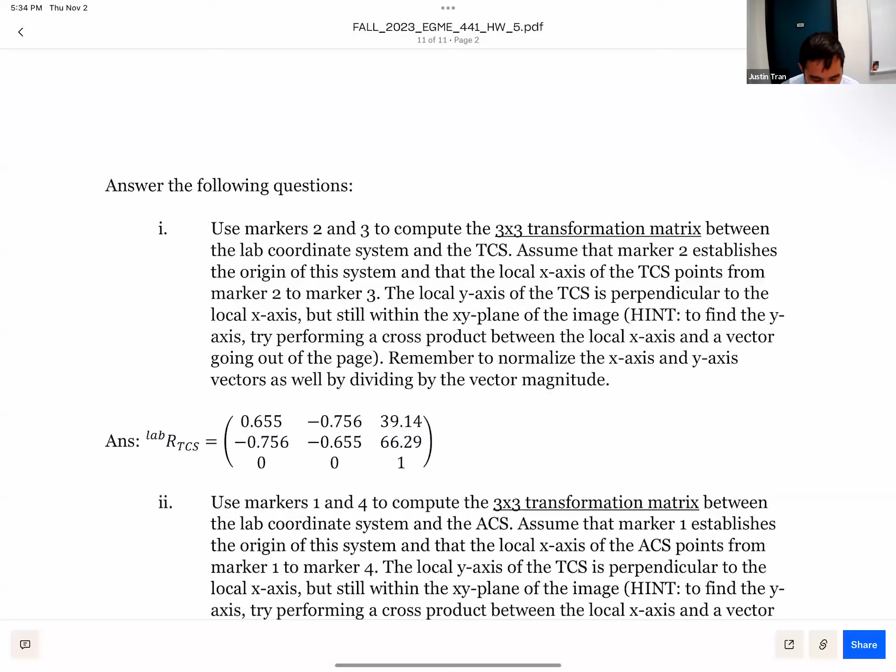So I've always been like this, 12 years ago to today, I haven't changed at all. It's also funny that we still use the same fluid mechanics textbook today as we did 12 years ago. I still have that textbook in my office too - I totally forgot about that until my mom showed it to me recently. Anyway, alright, let's get back to it.

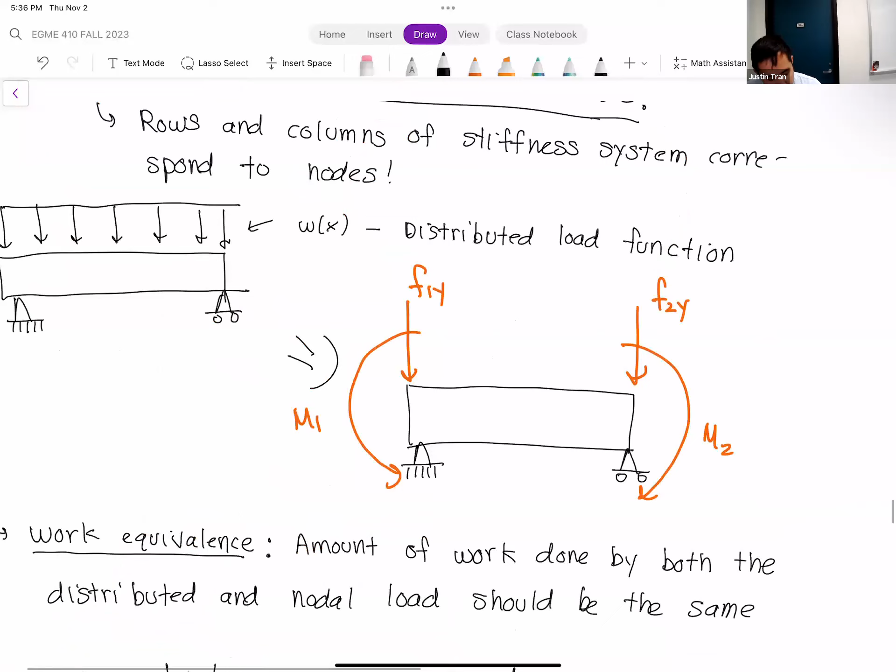So what we were covering on Tuesday before we left off was this idea of distributed loading. Let me scroll up to a good picture. Distributed loading is something we've been using in ANSYS a lot, and in fact that's the preferred way I've told you to apply loads - distribute it over a surface or over an edge. You want to avoid applying loads at a point.

But the conundrum we have is that in order to actually apply loads into your finite element system, into your global linear system, that giant matrix, we have to compute the loads at a point, because that's exactly how it's entered into the matrix. So to use a distributed loading in a finite element situation, we have to go through a conversion process to convert it into a nodal one - going from the image on the left to the image on the right.

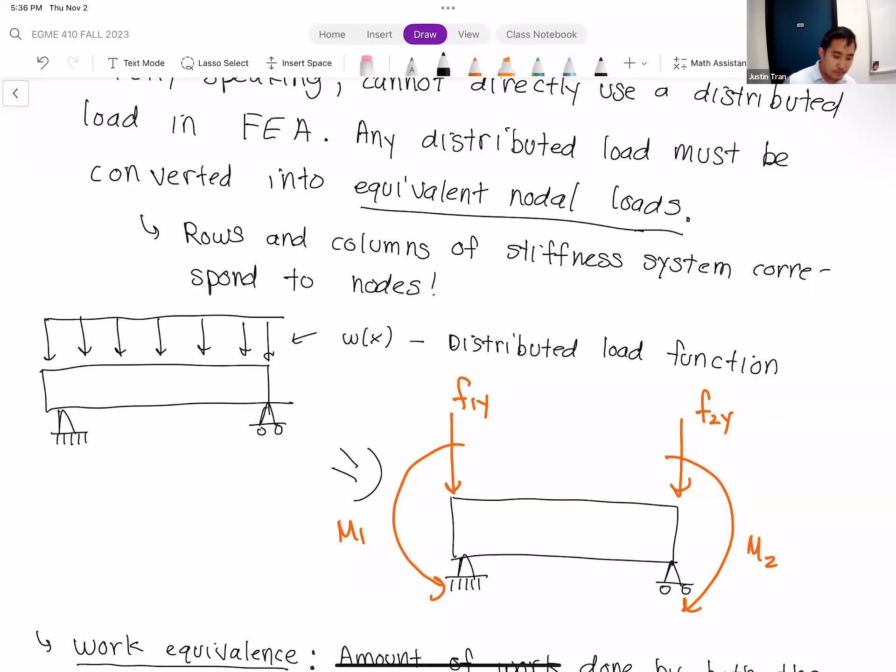To do that, we use this concept of work equivalence: the work done by the distributed load should be equivalent to the work done by the nodal loads. We have this equality relationship where on the left-hand side we have an integral equation, integrating the distributed load together with the shape functions for the element, and that's equal to the nodal loads on the right.

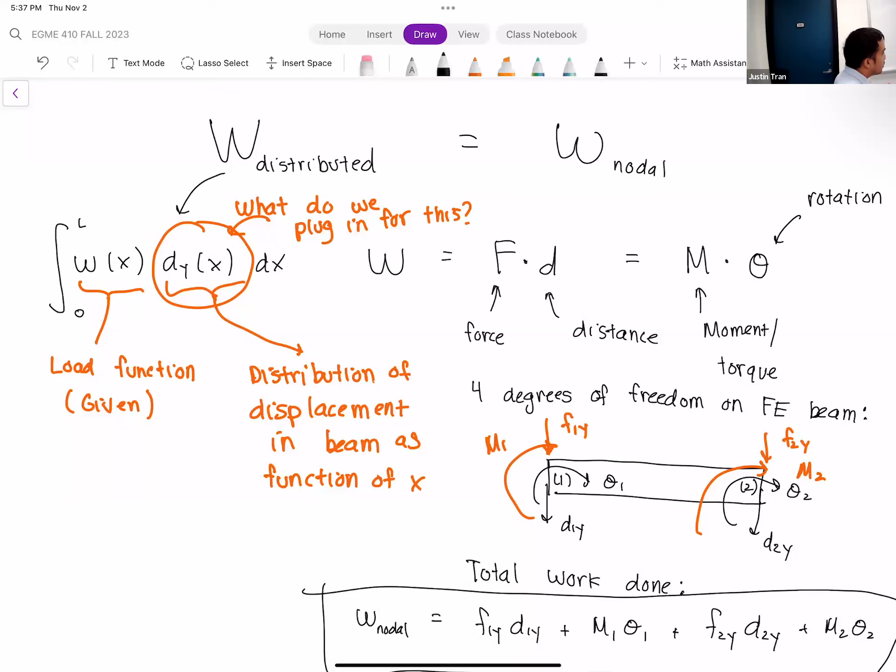So the example we're going to do today is I'm going to show you how to evaluate that integral on the left for a fairly simple distributed loading. Okay, let's come back down here.

Let's look at the following example. We're going to do this within the context of beam equations, but the same principle applies no matter what type of element you use. Of course, the exact equations and formulations used in ANSYS will be different, because they use tetrahedrons, hexahedrons, things like that, but the general concept and idea is the same.

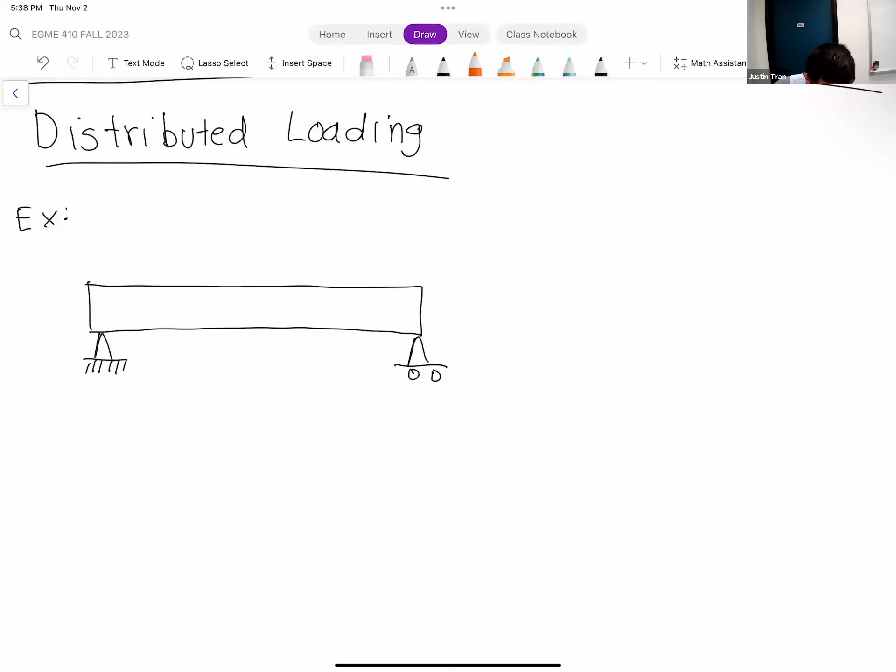Okay, so let's draw our beam here. On one side of the beam we're going to have a pin support, and on the right side we have a roller support. So this beam is basically simply supported - there's just enough constraints to prevent any rigid body motion. And on top, we're going to have a distributed loading, but it's going to be a ramp: starting at 0 on the left-hand side, and ramping up just like that.

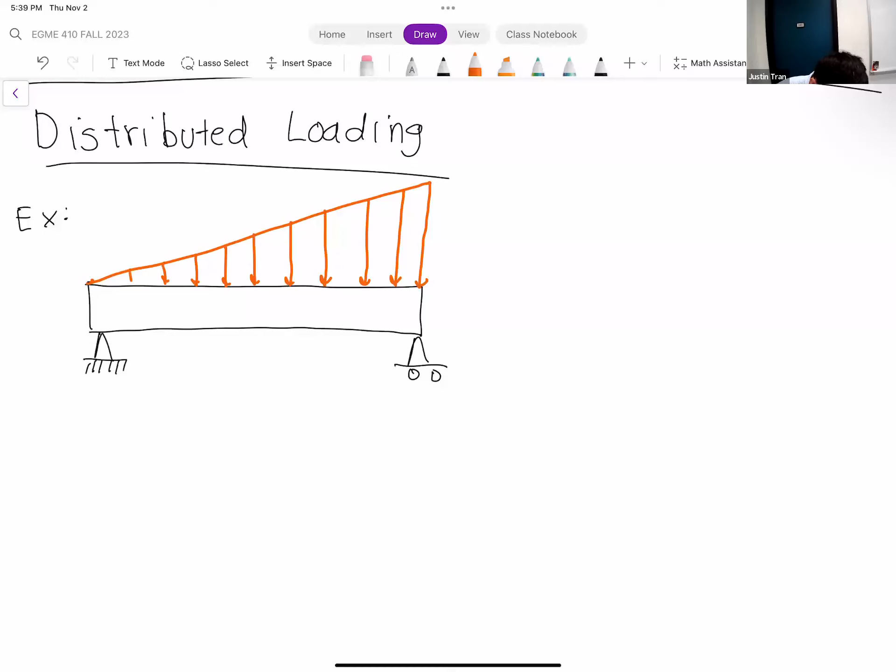Okay, so it's a load that's going to increase as the value of x increases as well. Let me draw this as well. We're going to say the x direction goes from left to right, and we're going to assume that the origin of the system is at the left pin. So right here, x is equal to 0.

And so we can write a functional form for this load, and that's going to be our w of x function. Remember, for these distributed load problems and for FEA problems in general, the load is going to be given to you. It's not something you have to guess.

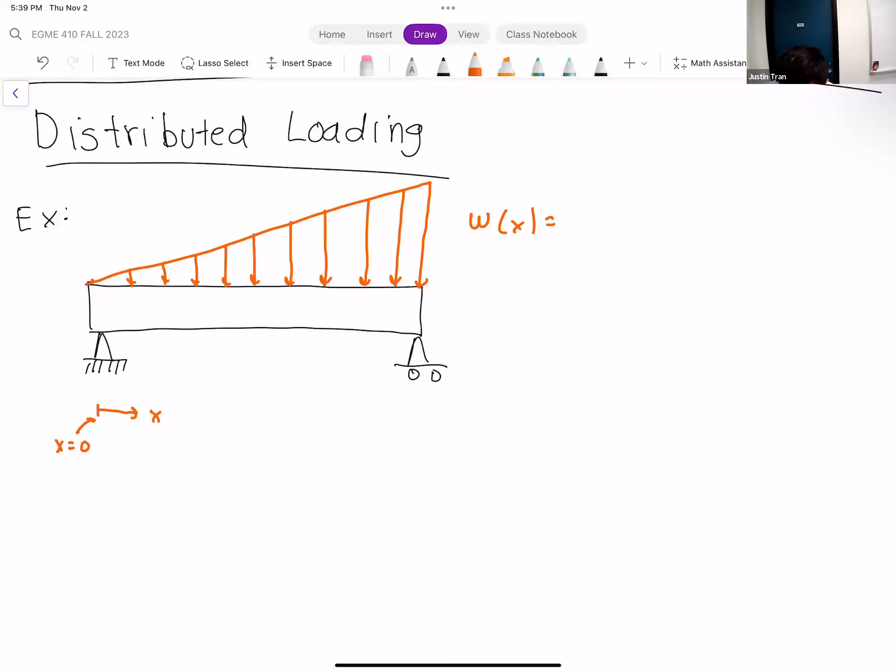And because it's a linear ramp, you can see that our load function is a linear function in x, so we say w of x is equal to 5,000x, and the units for this are going to be newtons per meter.

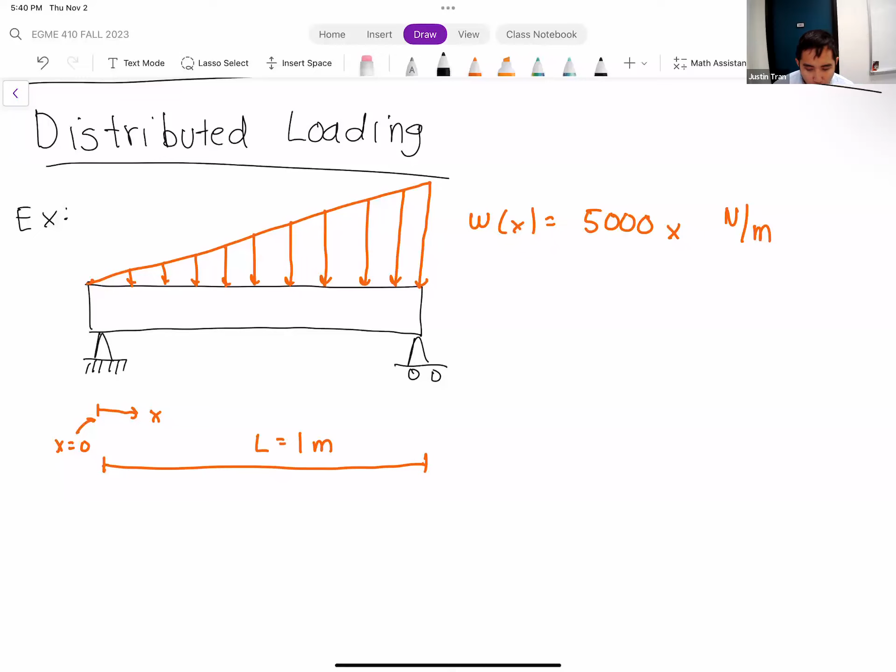And then we're going to say that the total length of this beam is going to be 1 meter. So there's no finite element problem that we're going to solve here, and all we're going to do is compute the nodal loads.

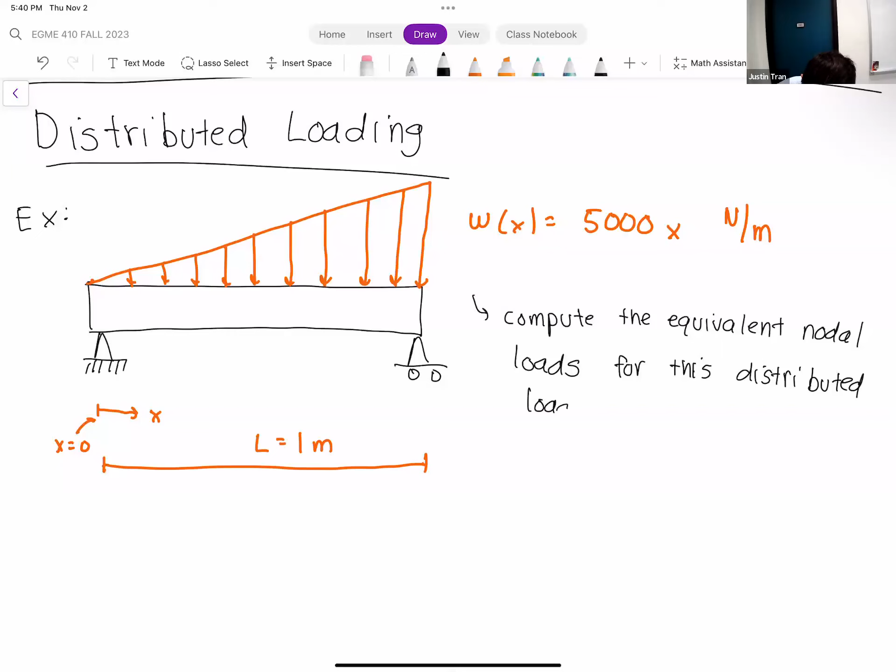In other words, if we call the two ends of this beam node 1 for the left end and node 2 for the right end, what we want to compute is F1y, M1, F2y, and M2. So four things we want to compute from this, and it's all going to come from that work equivalence formula.

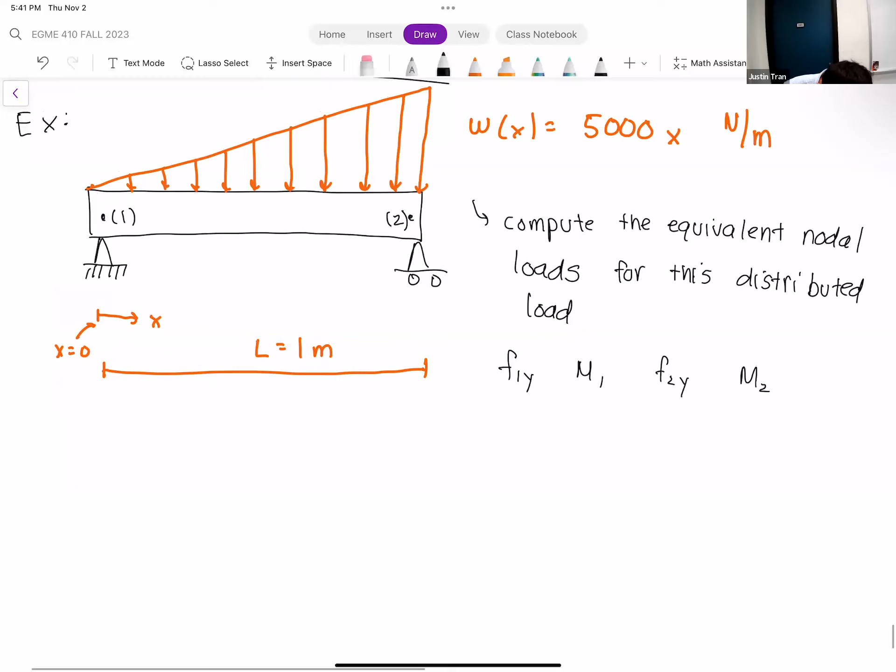Okay, so let's go ahead and set up that formula. Our work equivalence formula is the following: we're going to integrate from 0 to L of W of x times dy of x dx.

And that's equal to F1y d1y plus M1 theta 1 plus F2y d2y plus M2 theta 2.

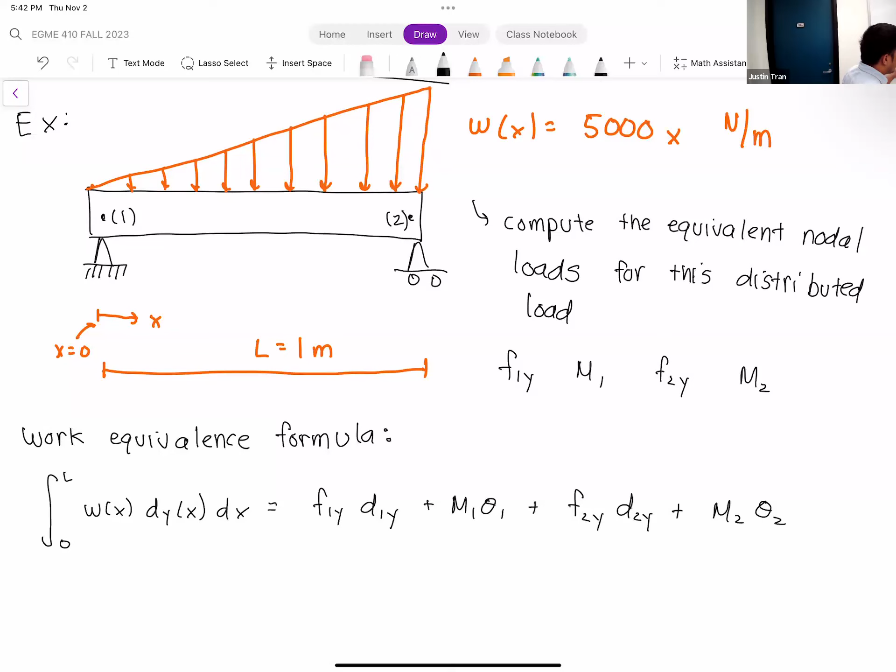So let's go ahead and plug in our expression for W of x. We're going to ignore, well not ignore, but the right-hand side of this equation is not going to change, so we're just going to work on the left-hand side. We'll bring back the right-hand side at the end once we're done.

So we have the integral. Let's go ahead and plug in our value for L. We know in this case L is just 1, so we're going to integrate from 0 to 1. W of x is 5,000x as given to us in the problem.

Then we're going to plug in our function for dy of x. This is what we covered at the end of class last time, right? So dy of x is essentially going to be our shape function for our beam element. This is where things are going to differ - when you're doing this kind of calculation for a different type of element, the shape function is going to be different, as we discussed in previous classes. But for now, we're going to use the cubic function that we know for beams. It's quite a doozy.

So we plug in for dy of x here, we get 2 over L cubed times d1y minus d2y, plus 1 over L squared times theta 1 plus theta 2. All this is multiplied by x cubed.

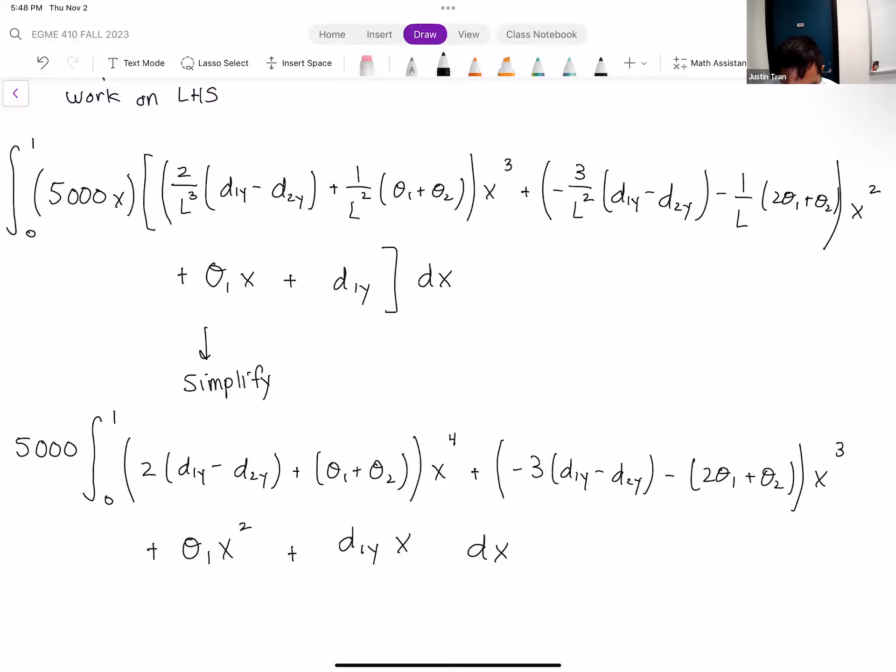I'm going to leave that 5,000 out there as a constant multiplier throughout this entire thing. I use square brackets here because we're going to enclose everything in that. So everything that's multiplied in front of the x's, I'm just going to bring down: we have 2 times d1y minus d2y plus theta1 plus theta2.

We have the integral of x to the 4th, which becomes x to the 5th divided by 5, plus minus 3 times d1y minus d2y minus 2 theta1 plus theta2, times x to the 4th divided by 4. Then we have the integral of theta1 x squared, which becomes theta1 x cubed divided by 3, plus d1y times x squared divided by 2.

And we're going to evaluate each of those x terms between 0 and 1. So it ended up that we just had a bunch of simple polynomial integrals to evaluate.

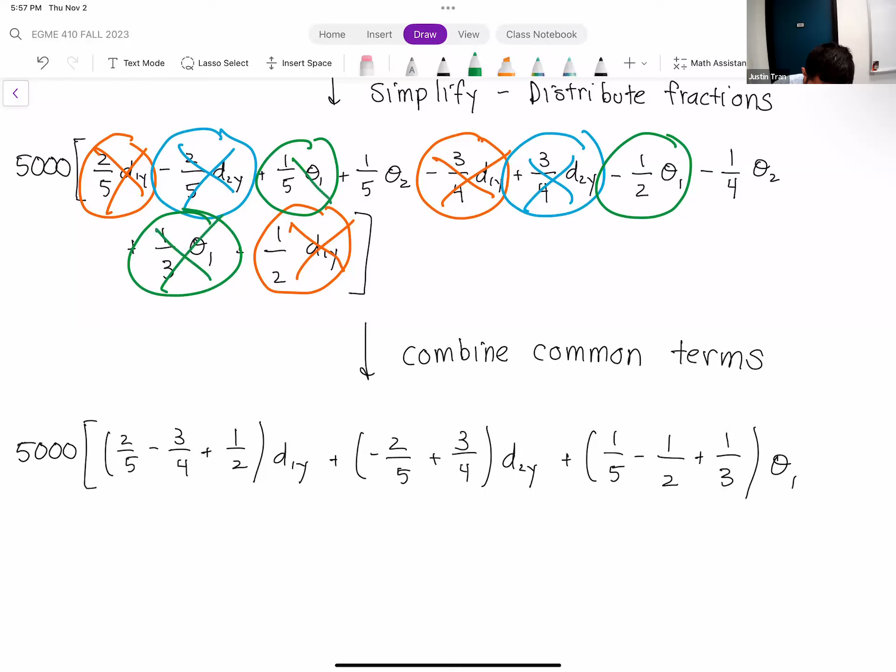And then we finally have the theta 2 terms, which is a positive 1/5 and a minus 1/4.

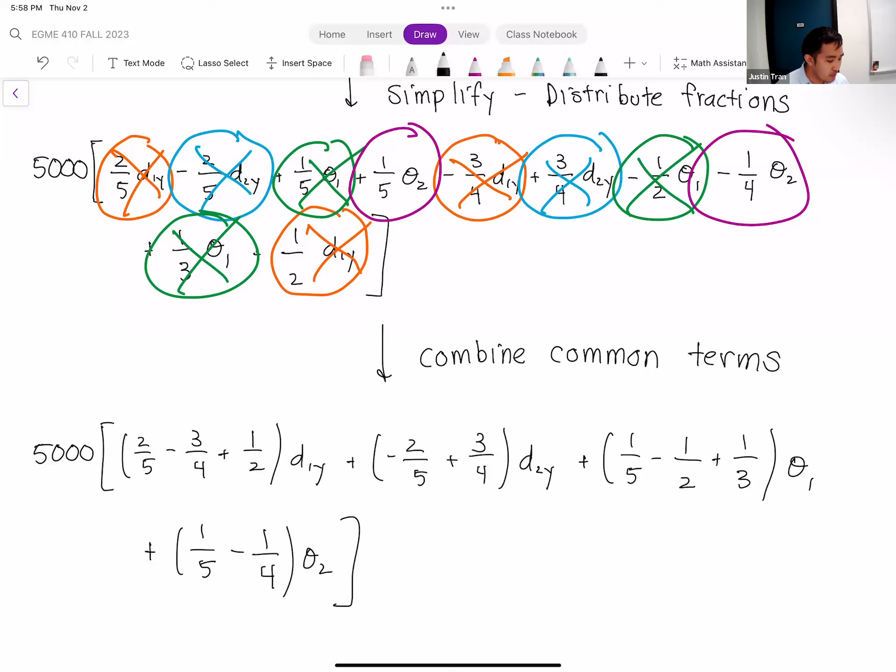All right, of course, all these are fractions which don't have a very convenient common denominator. That's kind of how it always is for these guys. So let's go ahead and combine these fractions. In theory, most of these are the same except for the theta 2 term. And so if we combine these together, we have 5,000. So the common denominator between 5, 4, and 2 is 20. Very nice, convenient number.

So this is going to be a positive 3/20 d1y. Then for d2y, we have a minus 2/5 plus 3/4. The common denominator for that is also 20. And so we have a plus 7/20 d2y. For theta 1, we have everything almost canceling out.

So we have a positive 1/5 plus 1/3 minus 1/2. And the common denominator for that is 30. So we have a plus 1/30 theta 1.

And then we have a 1/5 minus 1/4. The common denominator for that is again 20. So that should be, excuse me, 4/20 minus 5/20. So minus 1/20 theta 2.

Okay, so last step here, let's go ahead and multiply the 5,000, so it can finally have its chance to shine. We multiply everything by 5,000, and what we get is 750.

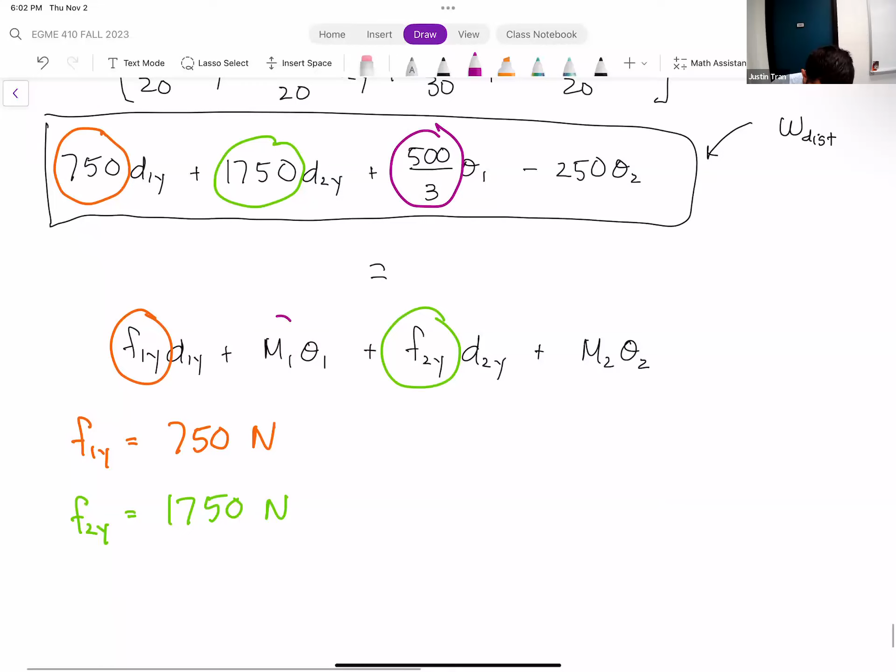The M1 is the only term multiplied by theta 1, so we have M1 is equal to 500 over 3 Newton meters.

And finally, M2 is the only term that's multiplied by theta 2, and so this tells us that M2 is equal to minus 250 Newton meters. And then this is our final answer.

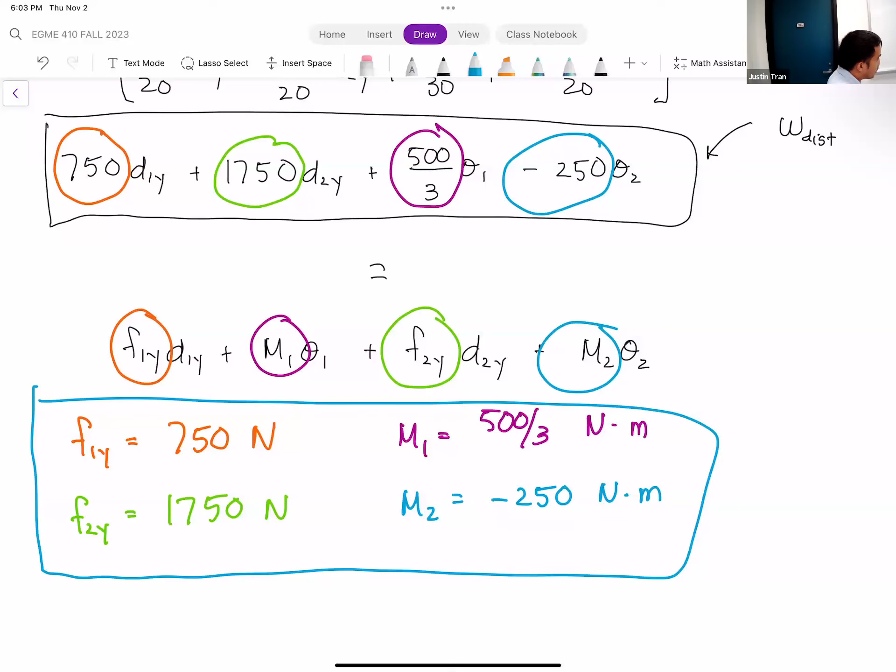All right, so let's check this answer to make sure that it makes sense. If we go back to the original problem statement, we know that this is a load that ramps up as it goes to the right. So just visually, we can see that there should be more load placed on node 2, more load on the right-hand side.

And so if we look at our values for F1y and F2y, we see that that's reflected in these numbers, right, F2y is over twice as much as F1y, and that's because the load is biased towards that right-hand side. So that makes total sense. And then the moments are kind of what they are as well.

Right, so now that we have this answer here, we have our nodal loads. If this were a more standard problem, we can actually use these to start solving the direct stiffness problem.

And so when you have a direct stiffness problem that has distributed loads, you kind of have to do two problems at once. You have to convert the distributed loading to nodal loading, which is a whole problem in itself. And then you have to take those loads and apply that to the direct stiffness problem, going through the whole thing with the element stiffness matrix, the assembly, boundary conditions, solving, and all that good stuff.

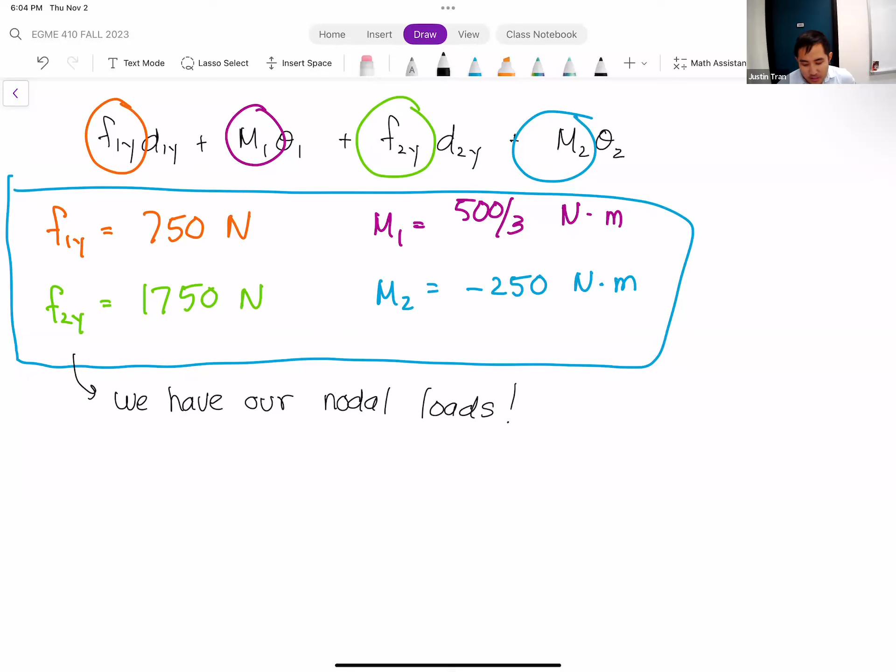It's like my friends always say. My friends and I play a lot of massively multiplayer online RPGs where you can create your own character. I have friends that will spend literally hours in character creation, just changing their character. They'll play the game for 12 hours and I'm like, oh, how's the game going? They're like, oh, we haven't started playing, it's been all character creation. So they'll make their character and say, alright, now we can start the game. So now that we've done this, now that we've completed this nodal load, it's like, alright, now we can start the problem.

All right, any questions on this? Sorry, could you pull up...

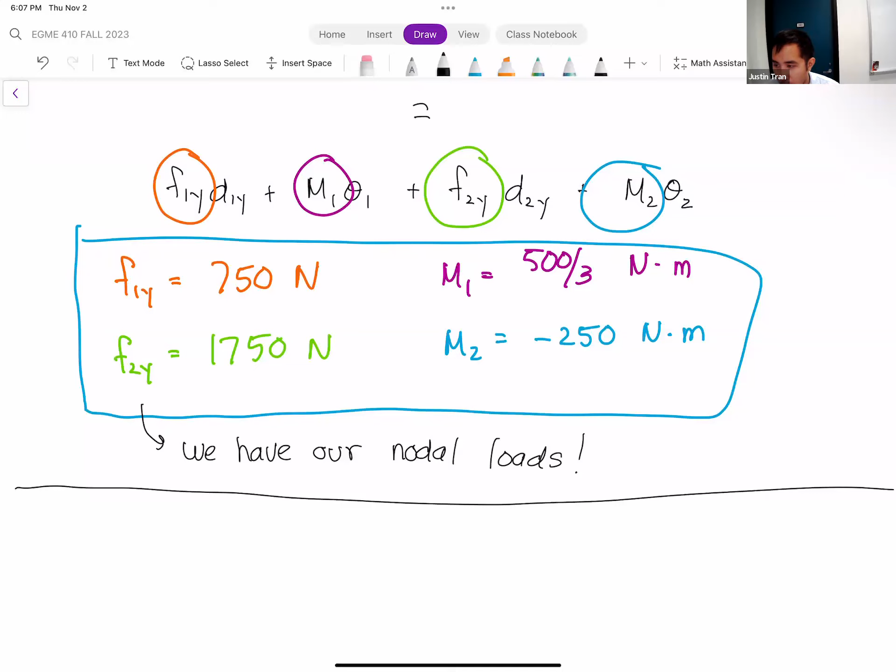From here on out, we're going to be covering more stuff within ANSYS, but this stuff is more specialized, not applied to everything. But it's still important because there are some situations where these are the only thing you can do. The first, more advanced feature we're going to cover in ANSYS is this idea of unsteady transient simulations.

This one's actually a fun one. If you're going to run an FEA simulation on an unsteady situation, which a lot of you are already doing, I've already talked with many of you applying FEA towards your senior design projects. You have situations that are transient, not static. You have dynamic loads, dynamic forces, and things like that. You can try to approximate these in a static situation, which is the conversation I've had with a lot of you who presented this to me. But if you want to do a true dynamic simulation, you have to do it within a different framework.

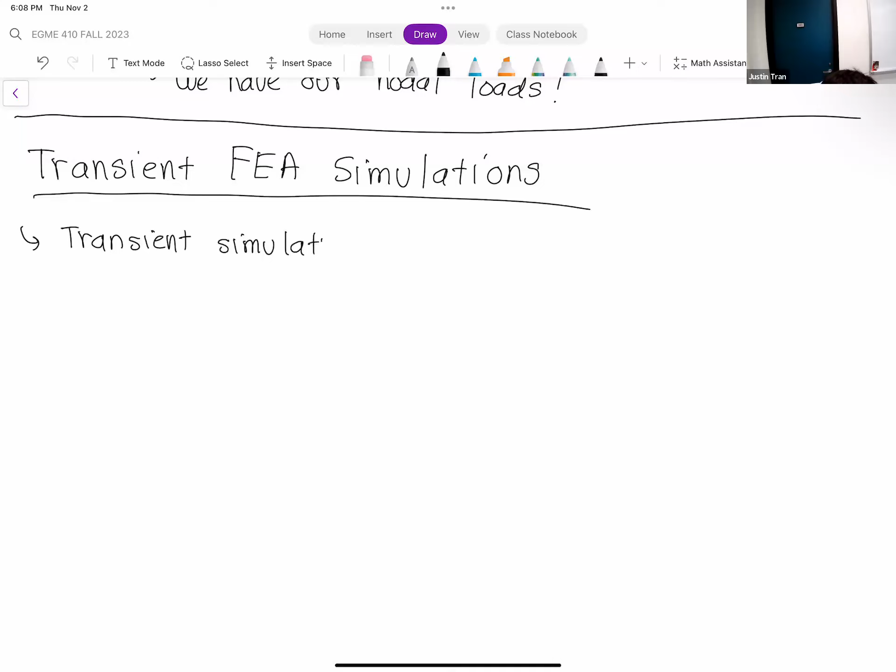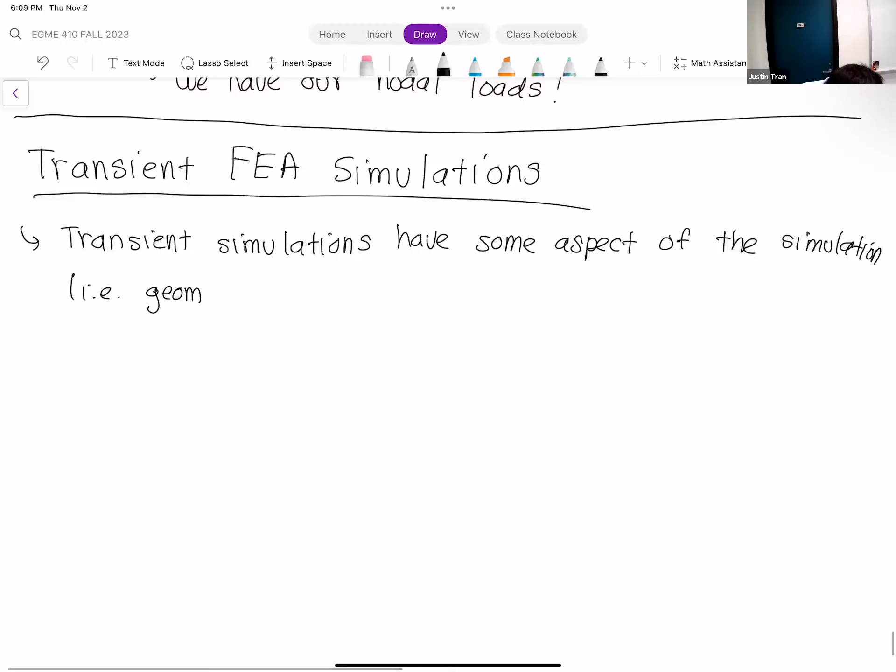So the definition of a transient simulation is basically any kind of time-dependent phenomena—anything that has forces, boundary conditions, or even geometries that change with time. For the most part, it's going to be boundary conditions, although there are some cases where the geometry can change with time as well. Anytime you have something that changes with time, you have to run it under a transient situation.

The biggest difference this makes is that we're no longer in a static situation, so we have to get away from static structural. In the activity next week, you'll see we're going to be using a whole new analysis framework called dynamics.

What we'll learn throughout the lecture today and on Tuesday is that dynamics has almost a completely different set of rules in terms of how to run the simulations. What we're going to cover in this class is just a very quick introduction, almost like a flash introduction to all these concepts.

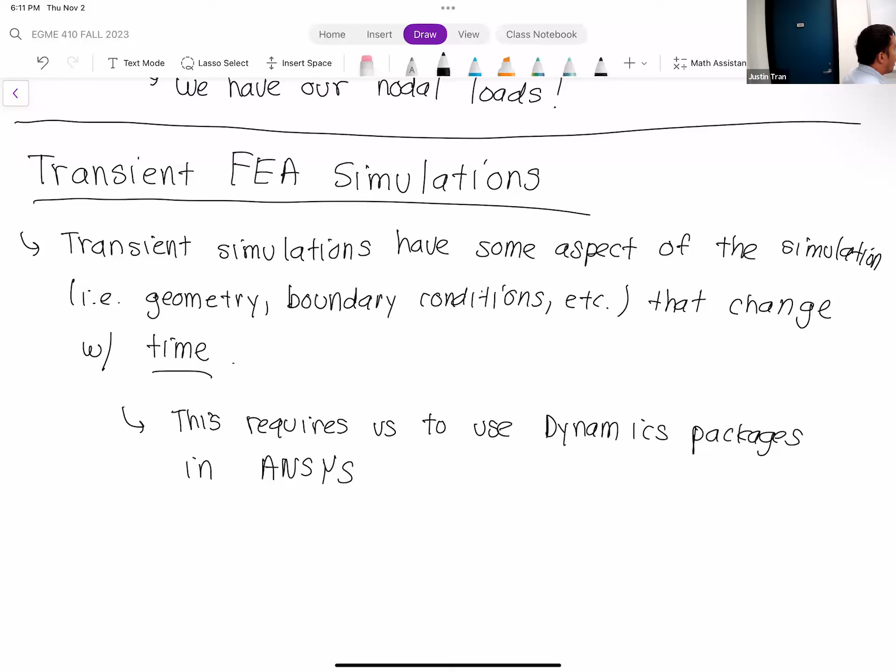If you want a true introduction to this, there are other classes you can take—actually the one I recommend is EGME 403, numerical methods, since a lot of those concepts apply here. We'll learn enough here to get you started running a very basic dynamic simulation, but there's a lot of nuance and extra considerations in dynamics that you don't have to make with statics. Just making you aware of that.

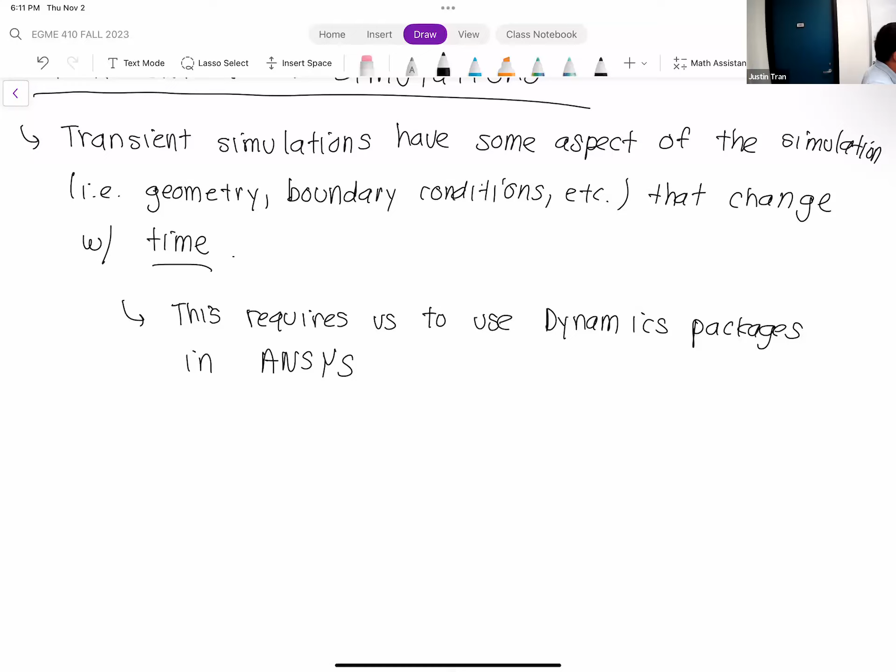Where we're going to start here is, because dynamics uses a whole different set of rules, we have to build up a different set of intuition. So we're going to start with a very basic model—just a very basic lumped mass model. We'll talk about the characteristics of that model, its expected results, and how that can be applied to ANSYS. So let's start with that.

So let's look at a fairly simple lumped mass model that you've probably seen at least in some form in one of your other courses.

The idea with the lumped mass model is that you have a mass of some kind attached to a spring, which is going to provide some kind of restoring force, as we've talked about before. But we're going to talk about its time-dependent behavior rather than static behavior. The one I'm going to use looks something like this, with a fixed wall on the left-hand side.

In the middle here, we're going to have a spring, with its own spring constant K. We're also going to have something here called a dash pot, which provides some damping to the system. Those two things are going to be in parallel, and then attached to this all, we have our mass. And just to give it a little personality, we'll give it some wheels.

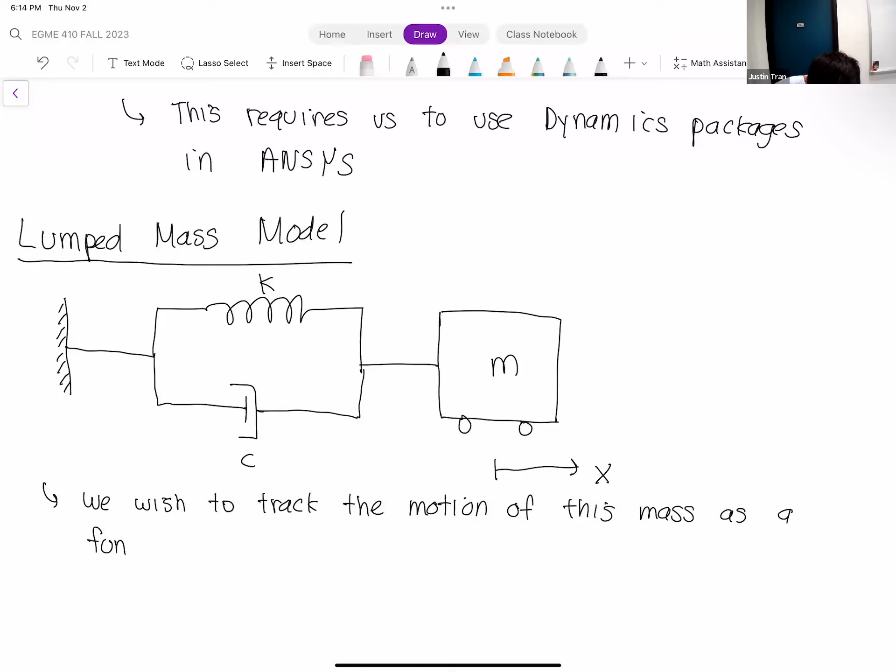What we're interested in this model is tracking the motion, or tracking the x position of this mass as a function of time. So we'll call that function x of t.

We're going to have time-dependent behavior because what's going to happen is that this mass is going to oscillate, moving back and forth. You can apply a force to this mass, or just give it an initial displacement. If you apply force to the mass and then let go, this mass is just going to oscillate back and forth.

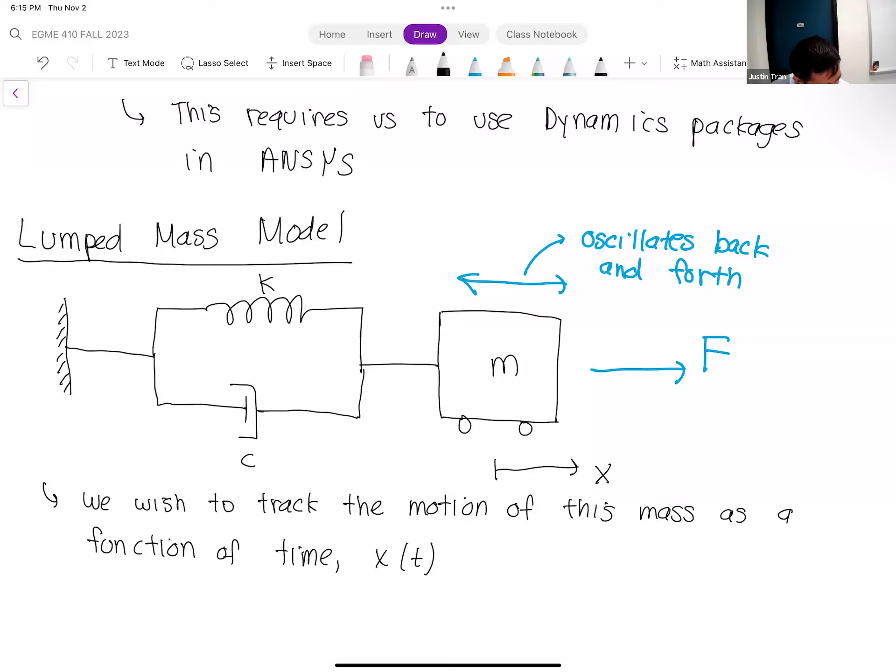Let me label all the parameters here because they're going to be important. First we have K, the spring constant of the system. C is the damping coefficient. And M is the mass.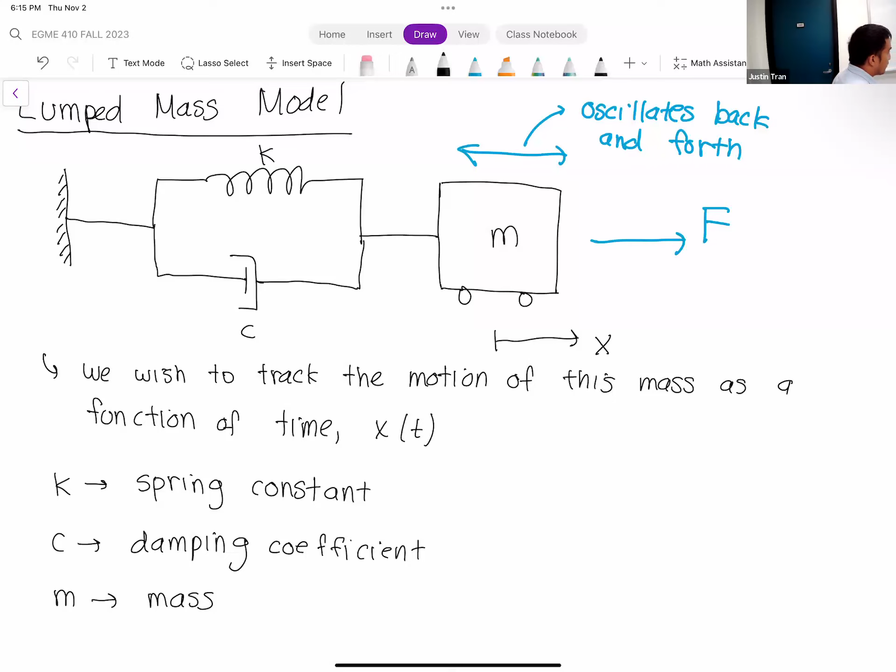In a bit, we're going to talk about the effects of each of these parameters on the behavior of the system, but I thought I'd define them first. And so the behavior of the system can be described by the following differential equation.

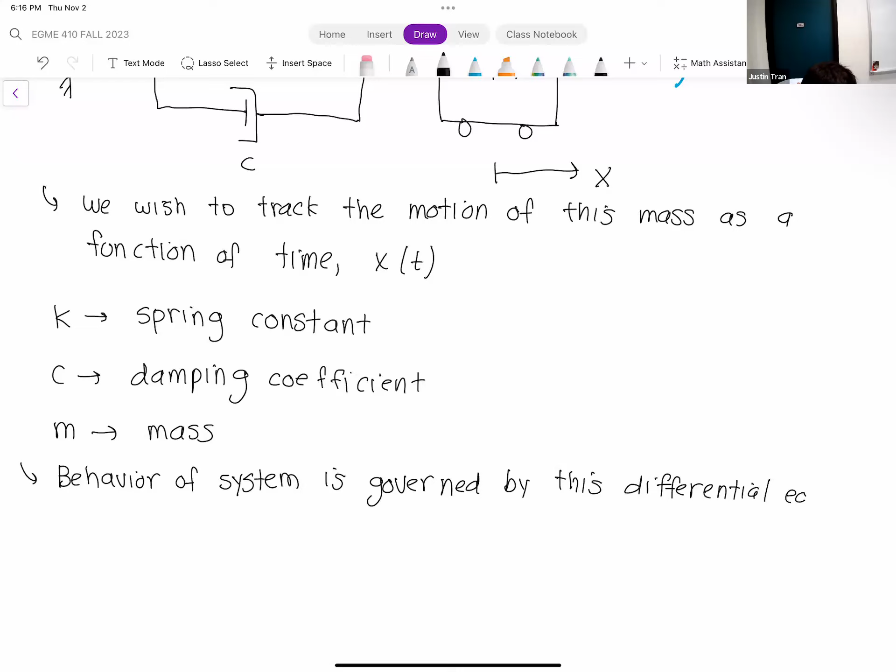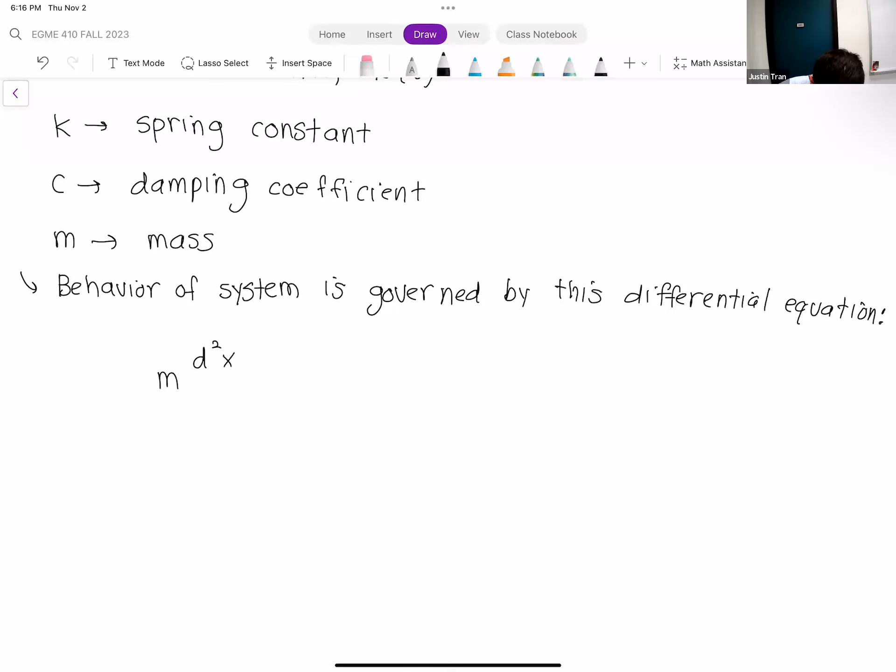It's a second order differential equation: m d squared x dt squared plus c times dx dt plus k times x is equal to f. That's the mass times the acceleration, plus the damping and spring terms. We're going to account for a case where maybe we're constantly applying a force f to the mass, and that f could also vary with time, so we'll say this is f as a function of t.

For our case right here, we're going to make the assumption that our damping is relatively small, so we're going to be in what's called an underdamped regime.

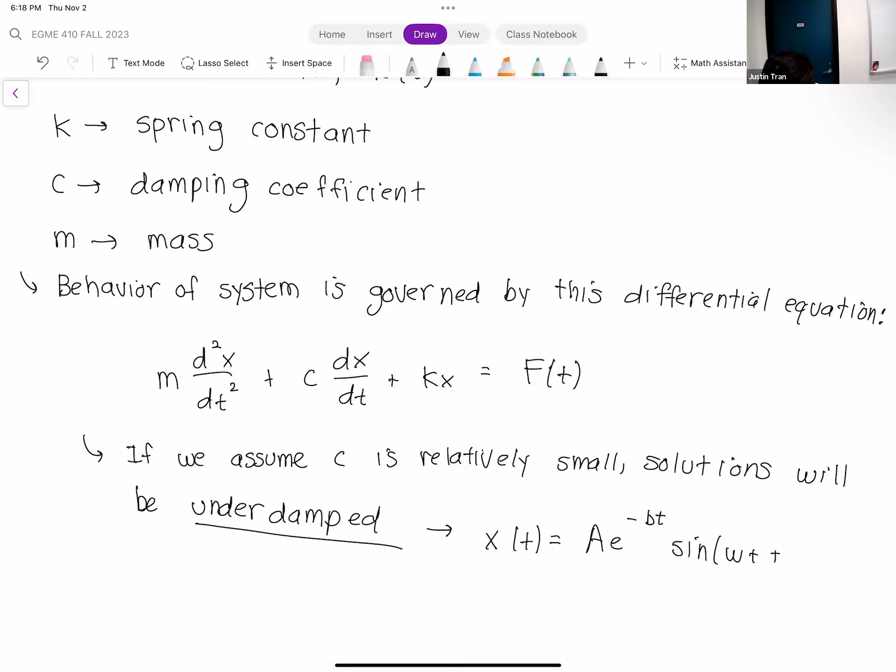Underdamped solutions look like what we call a decaying oscillation. Our x of t, the exact numbers for this depend on the parameters, but it has the following form: a e to the minus bt, times sine of omega t plus phi.

The exact values of those variables are not really important in this case, it's just the functional form, right? Because this function here is made up of two contributions: a decaying exponential and a sinusoid.

If we were to plot this, with our horizontal axis as time and our vertical axis as our displacement x of t, it would look something like this. We'd start out with oscillations with very large magnitude, but then as time goes on, the magnitude of those oscillations starts to go down, until eventually all of the oscillations will be damped out by the system and it returns to its quiescent state.

So why am I bringing up this idea of this lumped mass system in an FEA course? Well, the lumped mass system, as simple as it is, is kind of a very elementary description of vibration in a physical system.

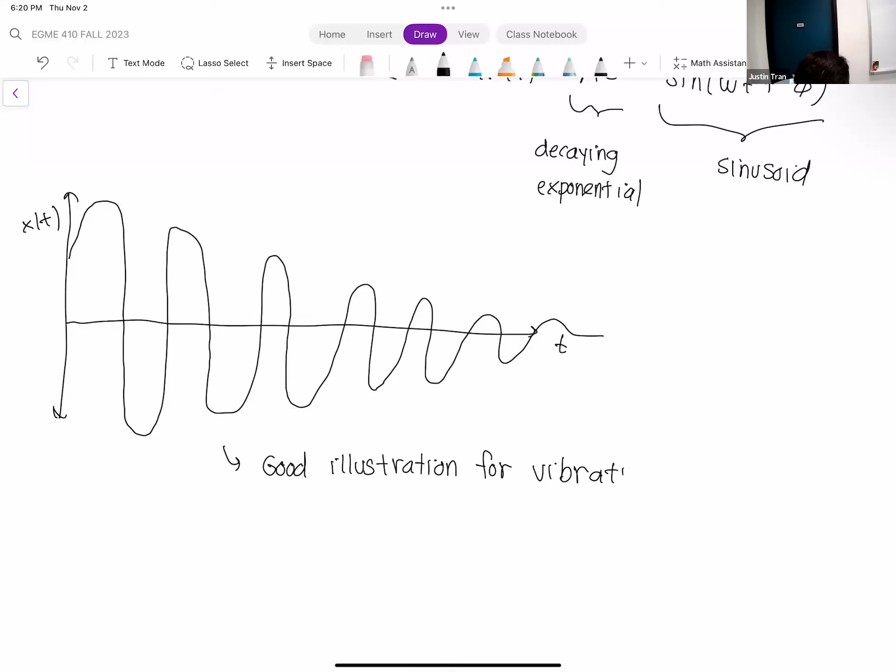If there's one thing we know about physical systems, it's that they like to vibrate when you expose them to sudden, unsteady loads. A simple understanding of the lumped mass spring actually gives you a lot of really good intuition for how dynamic systems behave. In fact, before the age of high-powered computers like we have today, engineers used this concept of a mass spring system to do vibration design of a lot of very big, complicated structures.

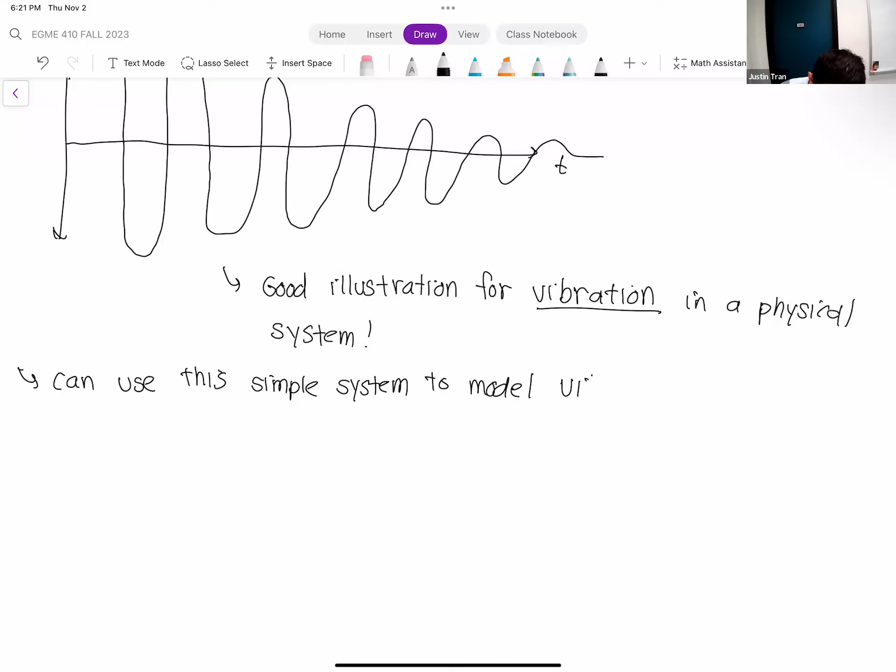When you start to run dynamic simulations, you're going to observe vibrations that look like this. Having good intuition and a good foundation for why those vibrations are happening will help a lot in interpreting your simulation. Key to this is interpreting the three main parameters that go into a lump mass system.

We named those three parameters above, but let's talk more about what they physically represent for a more complicated structure, and what effect those parameters have on the dynamic solution. So let's talk about the mass first.

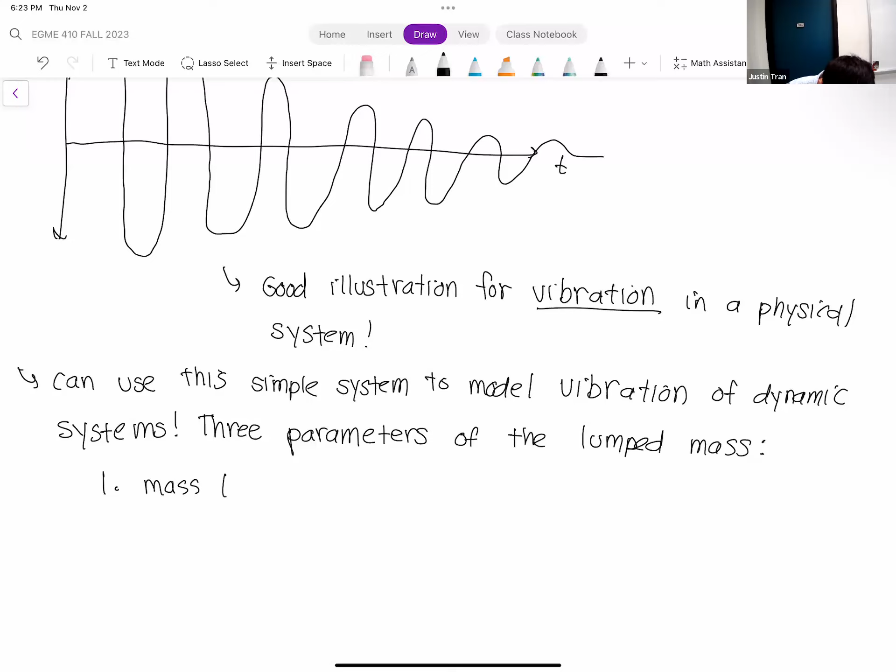This one's perhaps the easiest to understand and measure. The mass of a physical system is just its mass, a representation of how much mass there is. You understand what mass is. It tells you basically how much inertia that system has. The more mass a system has...

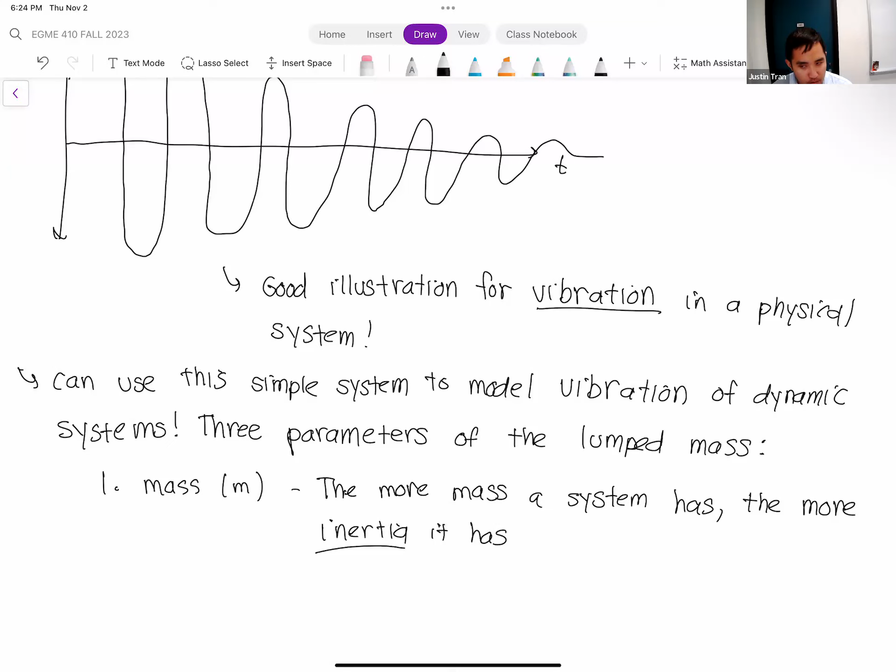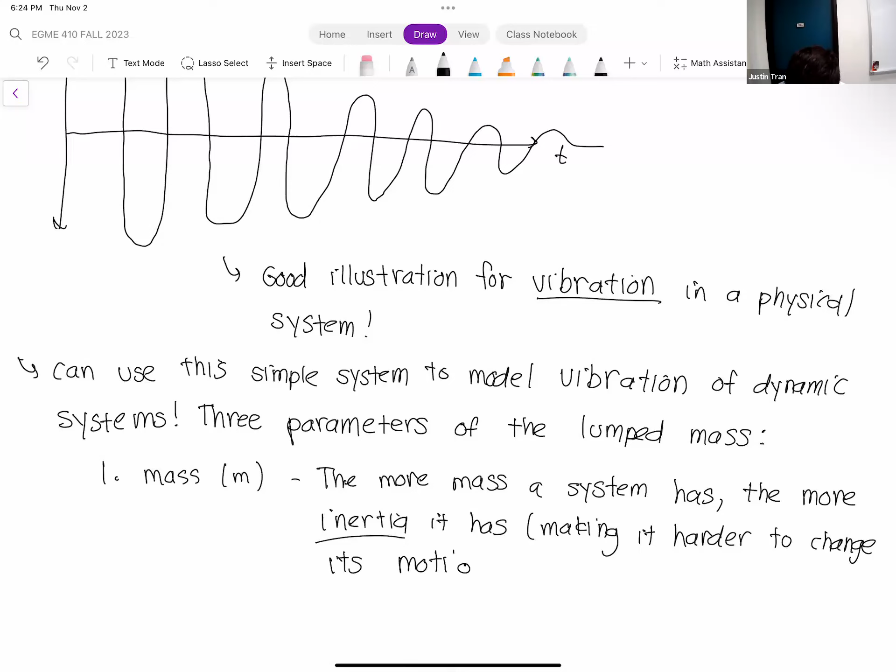If you recall from your physics courses, inertia is the ability for an object to resist changes in motion. So the more massive an object is, the harder it's going to be to change its motion, to change its momentum. The end result here is that as the mass of the system increases, it reduces the frequency of vibration.

You have this inverse relationship between mass and the frequency of vibration.

So the next parameter we'll look at is the spring constant. A spring constant is only strictly relevant for springs, but what we've seen in our truss equations is that a lot of structures can form what's known as an equivalent spring constant. It may not be coiled like a spring, but based on the combination of its length, Young's modulus, and cross-sectional area, you can get an effective spring constant, or an effective stiffness constant, for that structure.

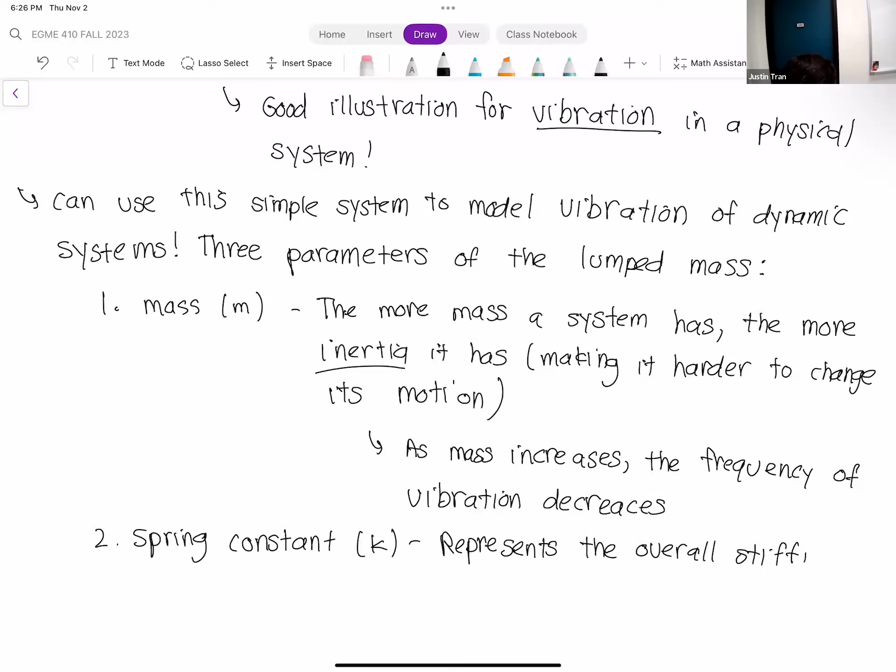The overall stiffness of a structure can be affected by a number of its internal parameters. Think about our truss bars: the parameters that go into the truss bar are things about its material, like Young's modulus, and also its geometry, its length and cross-sectional area. So the overall stiffness of a structure is a function of its material and geometric properties.

The Young's modulus is a very key component that goes into its effective spring constant: the higher your Young's modulus, the higher your stiffness, the higher your spring constant is going to be. For the geometry, usually the length has an inverse relationship, and the cross-sectional area or width of your structure has a direct relationship. In terms of the effect on the dynamic result, generally the higher your stiffness gets, the higher your frequency of oscillation is going to be. So it has the opposite effect of mass.

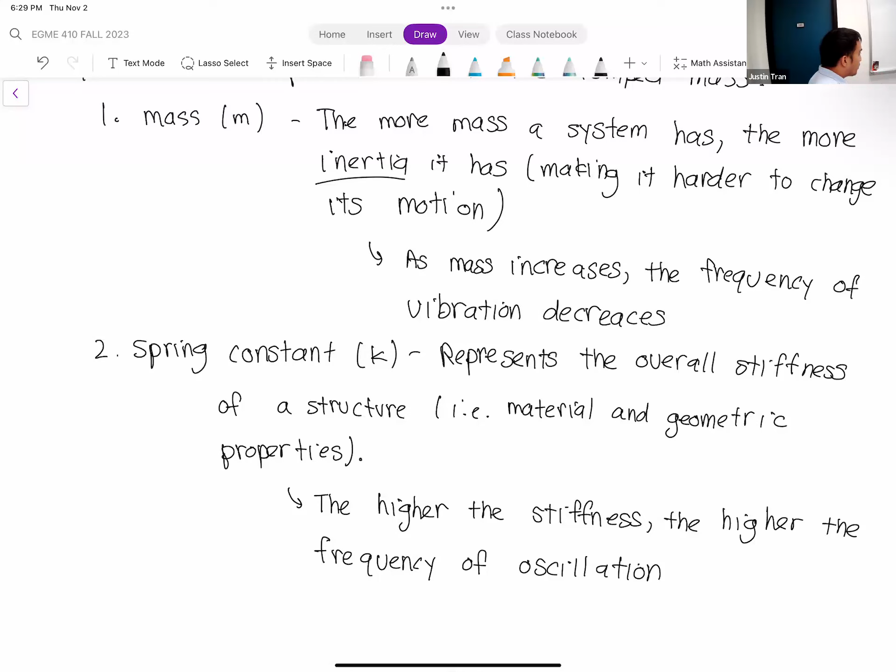And so the last factor here is the damping. The damping is kind of the most difficult feature to measure. For the first two, we can get a pretty good sense - the mass you should be able to measure exactly. For the spring constant, even though we may not have a spring, based on its material and geometric properties, we'd be able to get a good idea of what the spring constant is. The damping is a function of so many other factors that it's much more difficult to measure. But ultimately, its effect on the system is that it affects how quickly oscillations can get damped down.

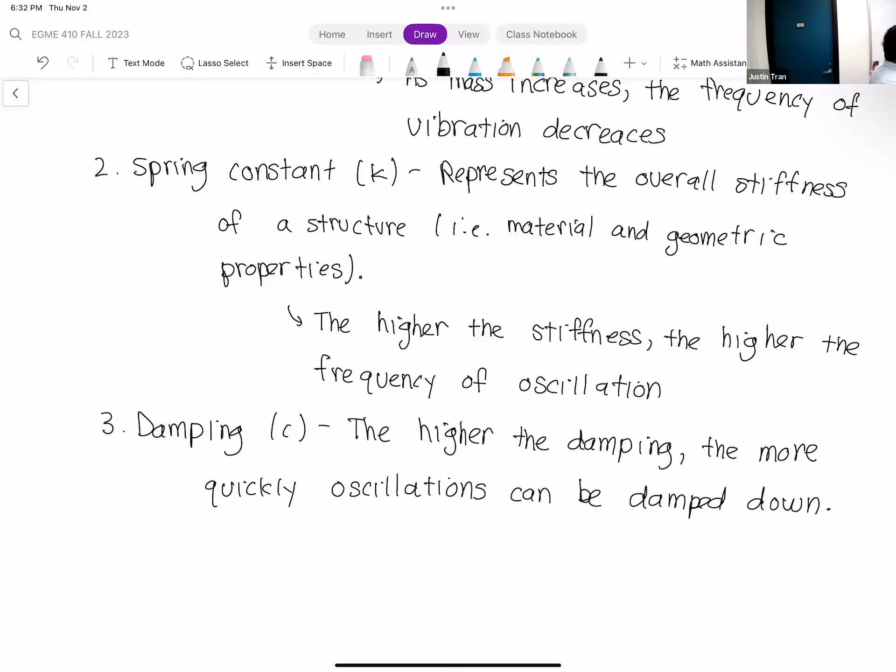So the next section that I want to talk about is the numerical solution to dynamics problems.

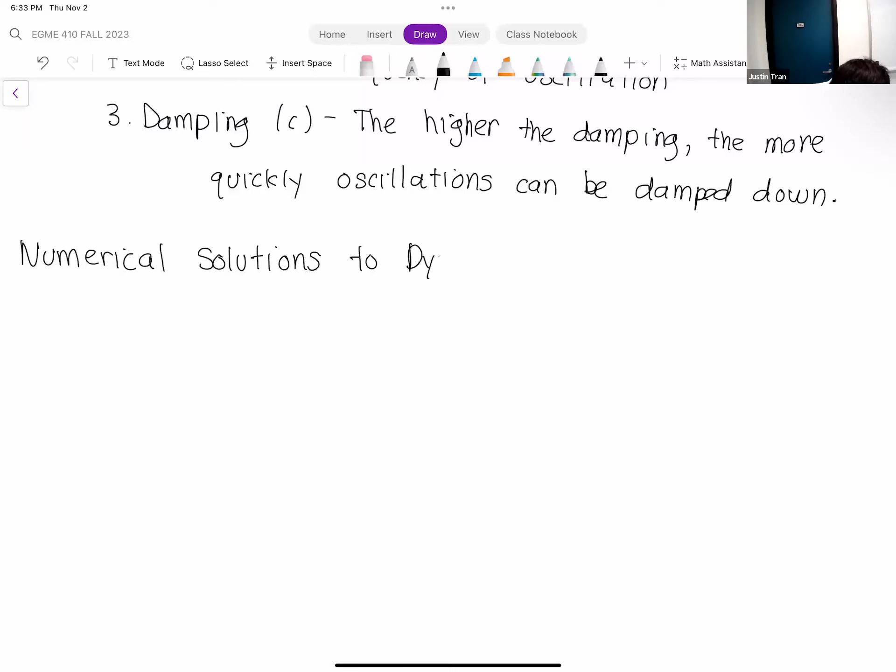The way that we numerically solve dynamics problems is quite different than what we've done before. We just finished talking about direct stiffness, where solving an FEA problem involves the construction of this very large matrix system of equations. Dynamic problems work a little differently because now, instead of space being our independent variable, time is our independent variable. Time actually behaves quite differently than space.

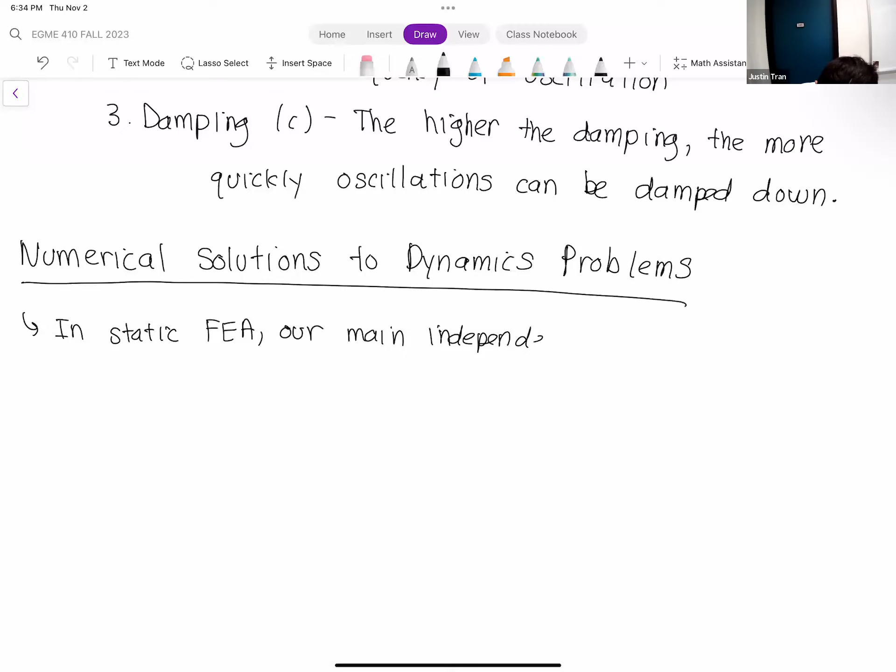By space, what I mean are the space variables like X, Y, Z if you're going in 3 dimensions.

The way static problems are typically solved is that your solution at all points in space are solved simultaneously - they're solved all at the same time.

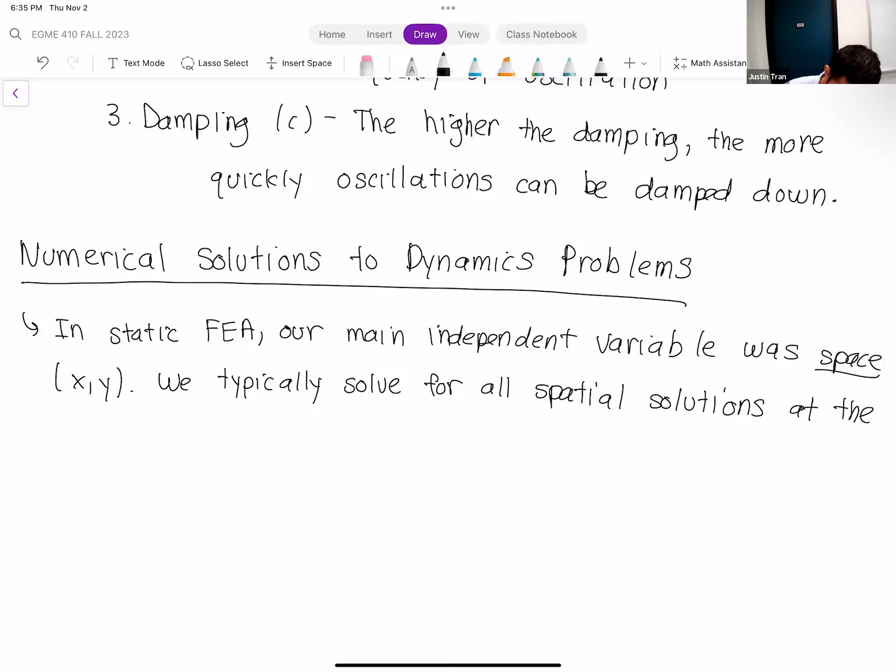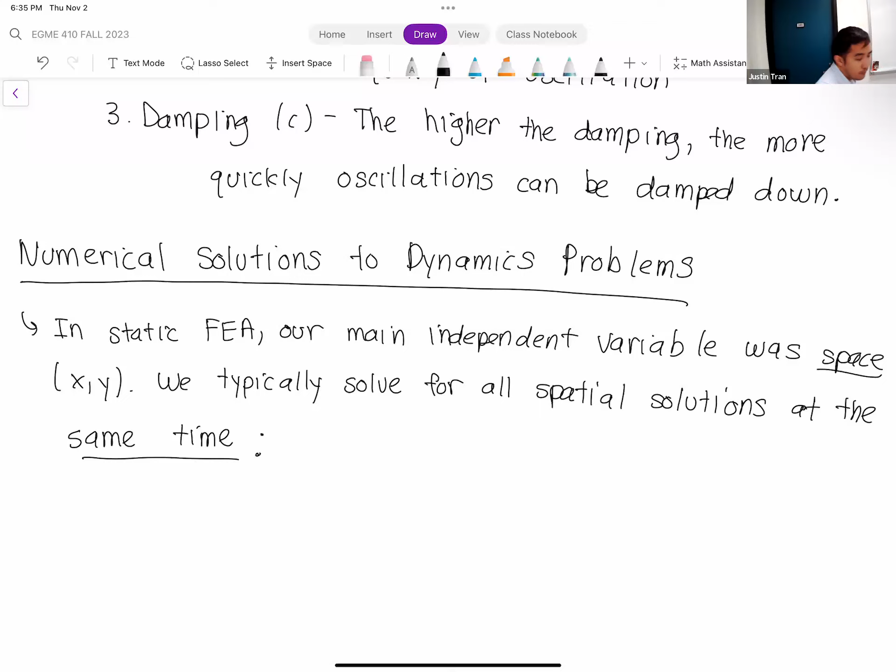What I mean by that is something like this: let's say we have our direct stiffness system, a 2-dimensional truss, maybe 4 nodes that we're solving for. So we have our matrix here, then we have our vector here - d1x, d1y, d2x, d2y, etc. - and this is equal to some forcing vector.

When we solve this system, solving it basically involves solving for the values of all the d variables all at once.

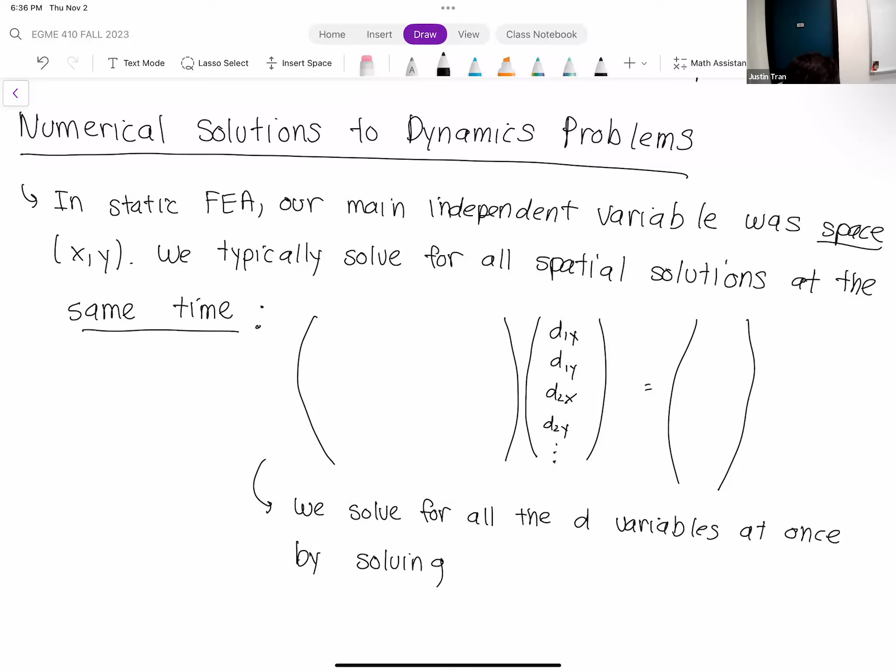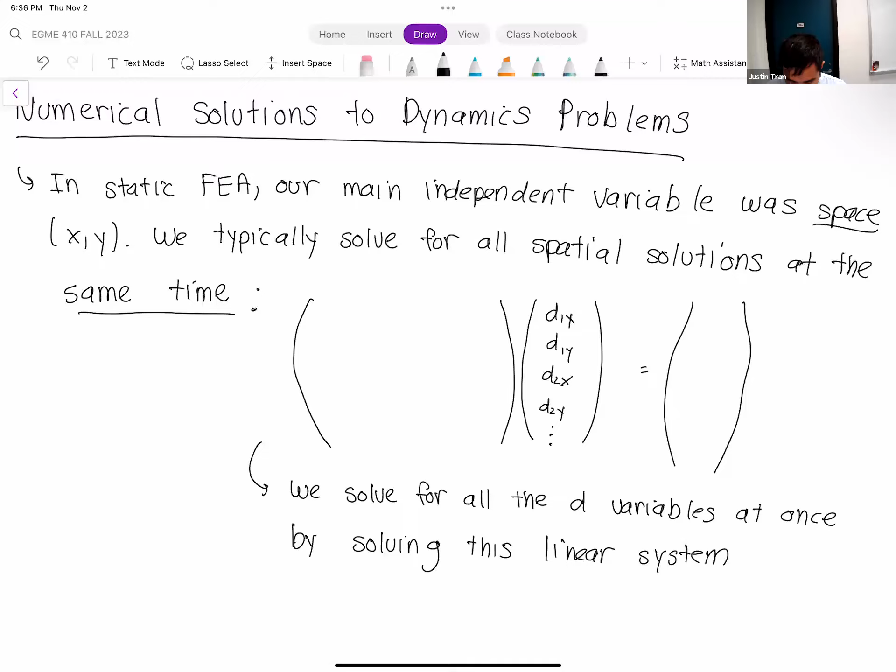Then when we finish solving it, our results are all displayed at the same time too. So we can observe every point in space at the same time. In other words, our result from this is basically a snapshot, a static image.

The reason for this is that when you're talking about space, things propagate through space very quickly. So when you make a change on one end of a structure, in a static situation, the other side kind of feels it immediately. There's no sense of delay in terms of space, and all points in space feel every change at the same time.

I'm making it sound cooler than it actually is, but if you think about a table or any static structure, and you make a change on one side, the other side feels it immediately, just because it's a function of space. Time doesn't work like this. Time is what we call a causal variable.

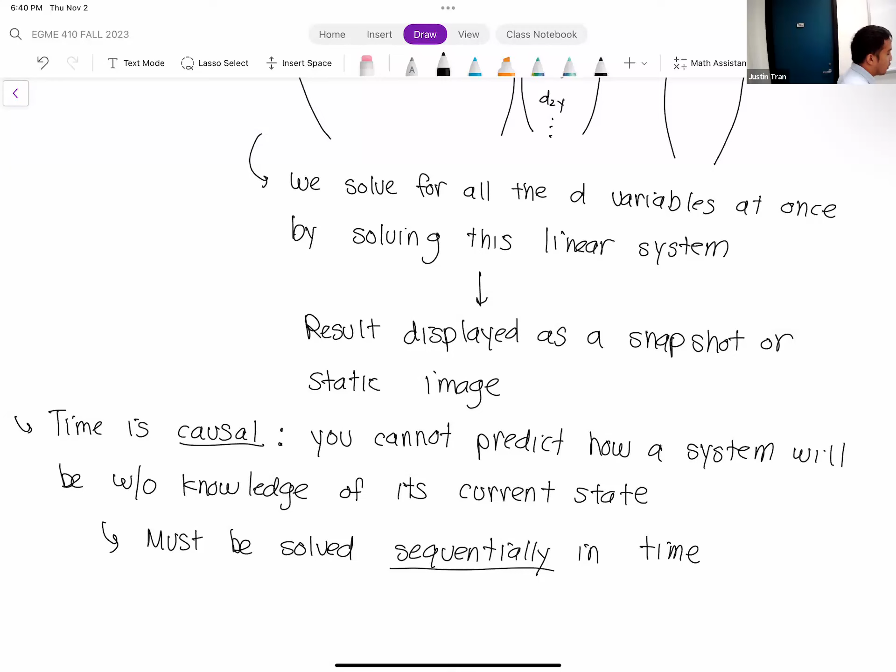Due to the fact that you have to solve for the time domain sequentially, it presents a new set of challenges in terms of how you actually find the numerical solution. Because you can no longer solve a matrix set of equations like this, say with T1, T2, T3, T4 — that doesn't exist. You can't solve for the solution at all points in time simultaneously using a matrix system.

In fact, the method that we use for solving time domain problems numerically is different. If you want to learn more, the typical name we use for these types of algorithms or approaches is time marching algorithms.

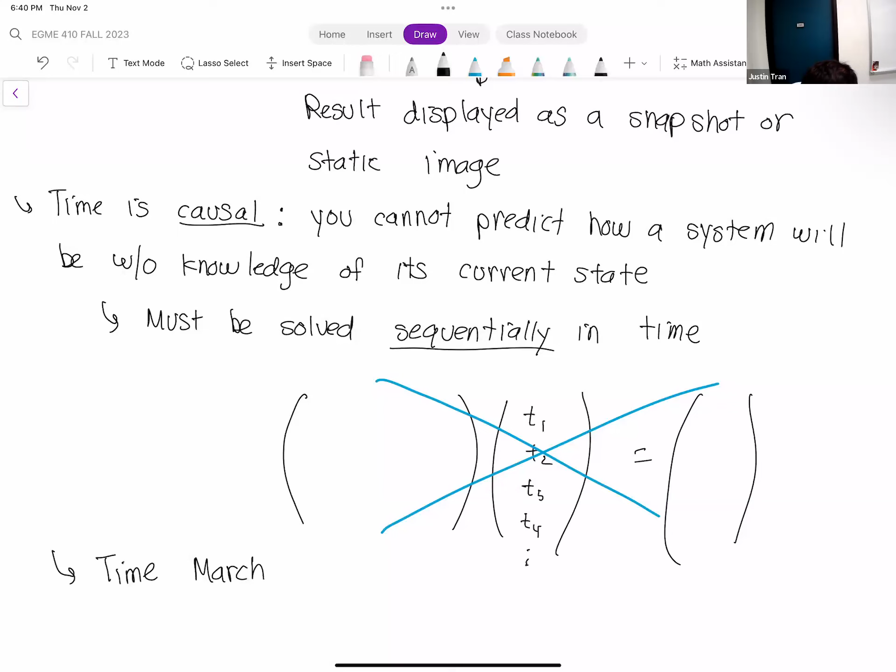Time marching is a whole class in itself, and we're definitely not going to get into the details of time marching. We're just going to deal with the essential things you need to know to work with it practically. But know that it's a very large field, still very much an active field of research.

The thing I want to highlight is that because we're using different methods to solve the time domain, and because we have this restriction of having to solve things one state at a time, our transient FEA solutions, our unsteady FEA solutions, are going to be a lot more expensive than our static cases.

If you look at the results of a dynamic simulation, it makes a lot of sense, because the nature of our results is going to change. No longer are our results just a static image. Now we're going to have multiple static images, each depicting the state of the system at a different time. When you play it all at once, it's actually going to look like a video or movie.